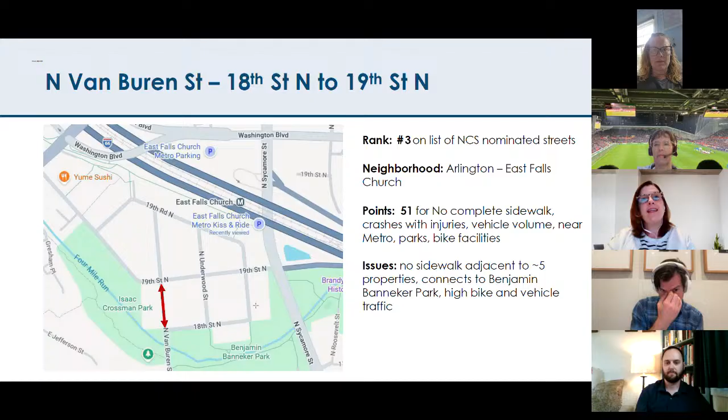The first is, and I suspect several of these will be quite well known to the group, where there is missing sidewalk in the Arlington East Falls Church neighborhood. The first section being on North Van Buren. These are very, very well supported projects by the community. They both connect to Benjamin Banneker Park. They're not super complicated because we have right of way, and it really is a matter of completing the missing link of sidewalk, in this case, adjacent to 5 single family properties.

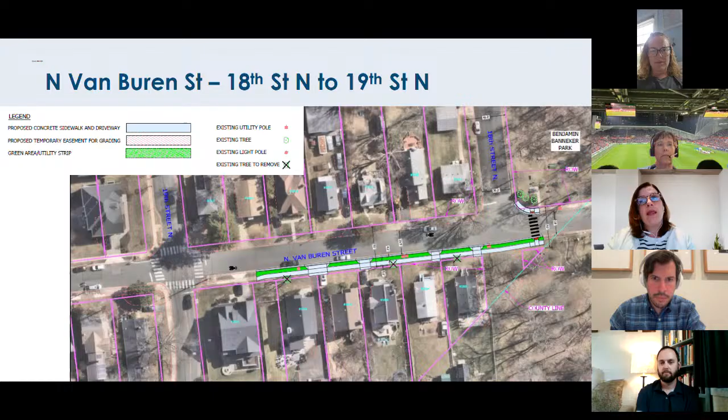So it's a very simple project scheme. We're looking to just complete the existing sidewalk network with an additional crossing across Van Buren, connecting into the entrance of Benjamin Banneker Park. The second is another small section of missing sidewalk right by another entrance into Benjamin Banneker Park. And both actually are very heavily traveled bike corridors connecting the W&OD trail through the neighborhood. So there's a lot of use and some conflict. So we hope that by completing the pedestrian facilities, it'll be actually beneficial to all modes of travel in these locations.

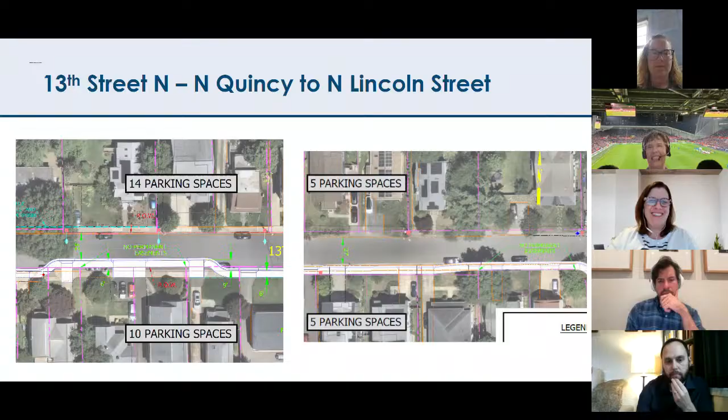And then moving on to a small project on Shirlington Road, where we similarly have a sidewalk situation where there are obstructions in the existing sidewalk. Because those obstructions continue on for many blocks, what we focused on was one accessible route from South Glebe Road to 22nd Street, so that a person walking can access the complete sidewalk network on 22nd Street South that would take you to Drew Elementary School and to John Robinson Jr. Town Square. It is not a perfect solution, but it is a fairly direct walk. It's the same facilities, just sort of the other side of Robinson Square.

And so we're focusing on just a gentle touch here to curve this sidewalk around the existing utility poles to create a contiguous, accessible path. The neck downs may also, we hope, help with some speed reduction as cars are coming off of Glebe Road. This is sort of a transition block. It would be great if we see some calming through this natural narrowing.

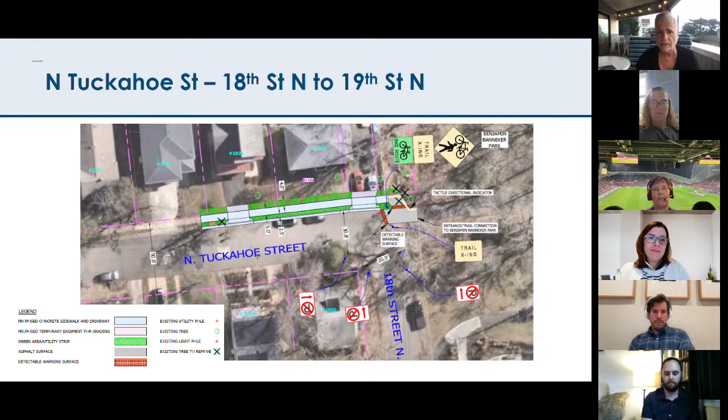And I have the same issue up in Virginia Square on 13th Street. I drive along that numerous times. The bump out, I think, is actually not a bug, but rather a feature. It will help. Actually, yeah, that's a wide street. That's a crazy wide street for a neighborhood like that.

If you're widening the sidewalks, I would say take it out of the street itself and leave parking on both sides. That will naturally slow people driving along there. So again, I have no problem with that bump out. In fact, I would allow parking along the bump out because that would be a natural choke point that would slow traffic. And there's a school just houses away from there. That's all to the good.

This is one of the things that does drive me a bit crazy, that we have so many of our residential streets that are way wider than they need to be, especially in the parts of the county that were developed after World War II. And I understand there's the fire code issues, which is something we really need to be negotiating better with the fire department about the width of our streets.

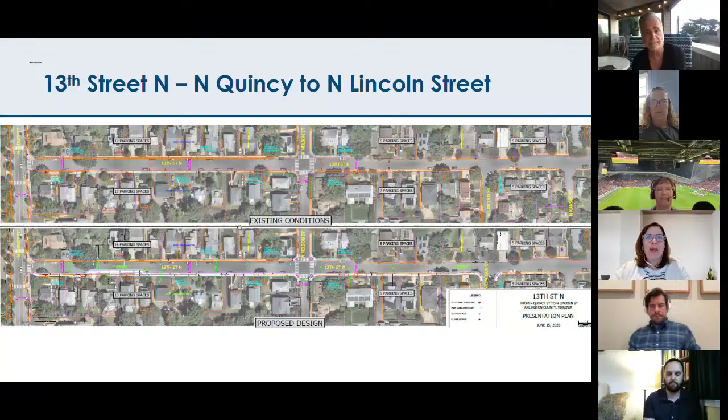It's safer to have a narrower street with slower traffic than one that would save 10 seconds for a fire truck going through. So anyway, that's my comment both on 13th Street in Virginia Square and in East Falls Church. As far as the one down in Green Valley, that's great. You have a couple of bump outs there. That's the whole point. You're going to end up slowing traffic along there. Especially, I think there's a hill there too, which is all to the better. So anyway, I'll support these definitely, but I really think we need to be thinking about why do we have these? Can we narrow streets wherever we can? Thank you.

Thank you. We did take a run at that, I will say. The previous chair did send letters and have discussion with the county manager about that, and alas, we were unsuccessful, but things change. Is that still the fire department issue? Yes. That's just crazy. I mean, that is absolutely crazy.

And the fire department definitely deserves to be taken seriously, but a lot of this is just a reaction without data and without thinking the entire thing through, with unintended consequences. So anyway, all the bump outs you put in there, go for it. I have no problem with having those there. The more the better, if we can't narrow the whole street. Thank you, Commissioner Lantelme. Commissioner Vanderpool, please.

Yes, I am really excited to see all these updates and changes, and I agree with both the other commissioners on pretty much everything. The area in Falls Church, I actually don't go that route when I bike. I go through a different part of the neighborhood, so I do not have to cross at that really busy intersection right by the East Falls Church Metro. But I understand that's kind of out of the scope of this. I agree, putting bump outs is a great way to slow traffic.

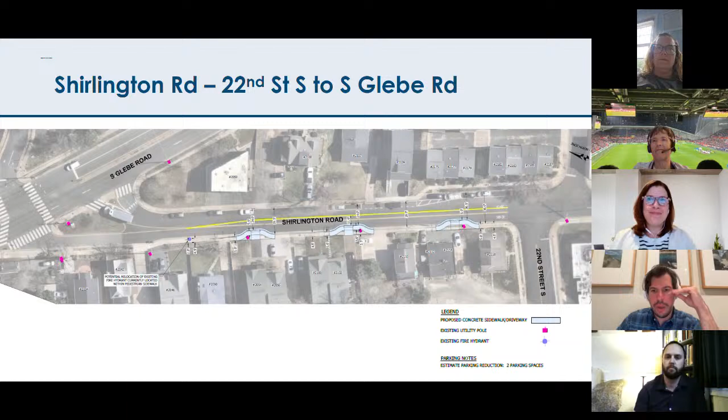I don't see any other hands up, so if you could please pull up the slide with the recommendation. All right. So I move that we vote on the recommendation that reads as follows. That the Transportation Commission recommend that the Arlington County Board approves the request to advance the following capital projects through the Neighborhood Complete Streets Program.

North Van Buren Street from 18th Street North to 19th Street North in the Arlington East Falls Church neighborhood. North Tuckahoe Street from 18th Street North to 19th Street North in the Arlington East Falls Church neighborhood. 13th Street North from North Quincy Street to North Lincoln Street in the Ballston-Virginia Square neighborhood, and Shirlington Road from South Glebe Road to 22nd Street South in the Green Valley neighborhood. Can I get a second for that?

Second. All right. Can start voting with Commissioner Forrest, aye. Vice Chair Furman, aye. Commissioner Hussain, aye. Commissioner Lantelme, aye. Commissioner Locker. I'm not. Commissioner Ludlow. Aye. I vote aye. Commissioner Theo. Aye. Commissioner Traer. Aye. And Commissioner Vanderpool. Aye. Thank you. It's a vote of 8, actually 9 in favor.

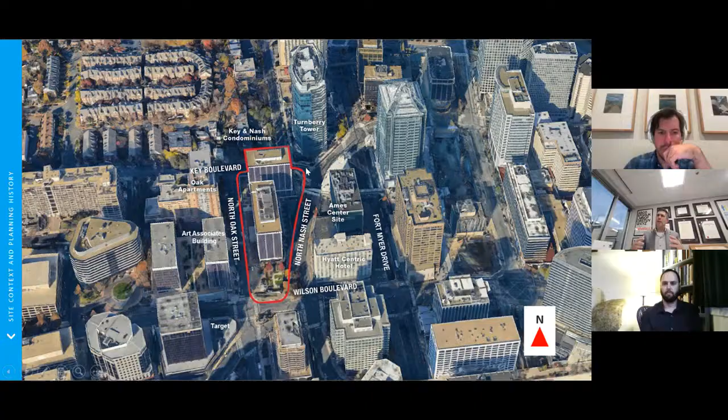As staff mentioned, what's old is new again. This is a 2.1 acre site that's located in the western part of central Rosslyn. Two office buildings that were constructed in the 1960s that have been 100% vacant for the last 2 years, a little over 365,000 square feet of development between the two of them. One thing to note is a substantial topographic drop of 40 feet between the southwestern corner of the site, where my cursor is, and the northeastern corner of the site, which is where Key Boulevard and North Nash Street is. And so a lot of the ways that we've responded to the site, handled the new monumental stairs and the 18th Street corridor have been really driven by the topographic change that occurs on the property.

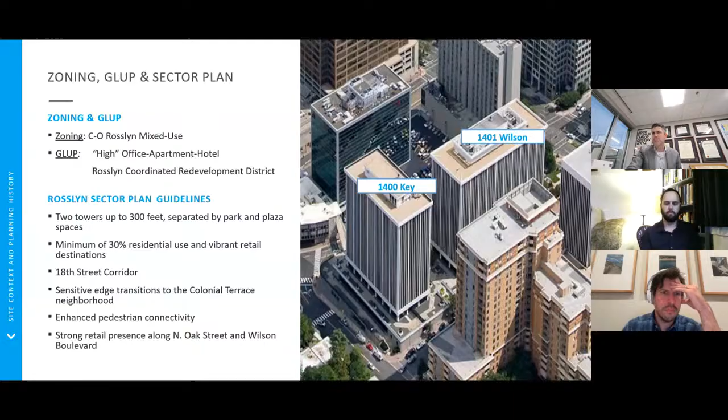Not going to spend too much time on the zoning, GLUP, and sector plan, as Mr. Gibson had already covered it. Suffice to say that we have used this as the recipe for the proposal that's before you this evening. Back in 2014, Monday received approvals to redevelop the site, as Mr. Gibson said, with an office tower and a residential tower anchored by a grocery store. These are images from that approval. And unfortunately, market conditions at the time prevented Monday from securing financing to move forward.

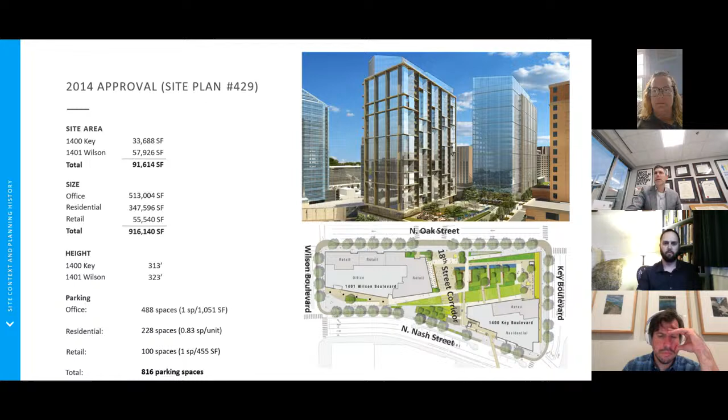But construction of the project was also hampered by the decline in office demand and the market realities in a post-pandemic environment. And so Monday spent several years of careful evaluation and landed on the proposal that is before you this evening that it believes finally realizes the longstanding vision of the Rosslyn Sector Plan for this property, specifically, as Mr. Gibson mentioned, delivering the western bookend of the planned 18th Street corridor, while at the same time delivering new housing supply and doing everything we possibly can to deliver a national credit grocery store on the site. And so what is before you essentially carries forward a lot of the same bones as was the case back in 2014. High quality public realm, urban amenities.

It retains the two tower concept, but the tower that's in the foreground, the white tower, that is the Wilson Tower. That used to be the 24-story office building. That is now proposed as a 27-story multifamily residential building. The tower that's in the background, the Key Tower, which is at the corner of Nash and Key Boulevard, is retained as a residential tower. And so between the two of them, there will be 831 residential units. That's up from 274 units, which was proposed back in 2014. There is a little over 12,000 square feet of ground floor retail in the Wilson Tower, the one that's in the foreground. And then in the Key Tower, we have the grocery store.

Back in 2014, the grocery store fronted on Key Boulevard. The retail loading entrance is on Key Boulevard. The main building entrance for the grocer was on Key Boulevard. And after a lot of discussion with our broker, it was determined that it needed to be visible from Wilson Boulevard and really should be at a much more lively environment. And so we have moved it up to the 18th Street corridor, where it can be at the confluence of the key pedestrian and vehicular crossroads at Oak Street and the 18th Street corridor. And so that's what is shown here.

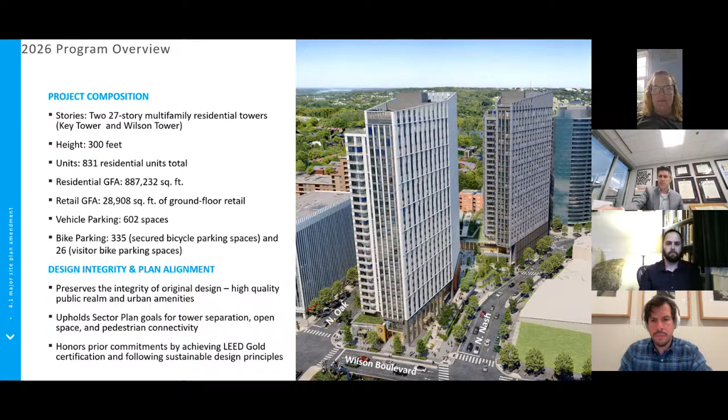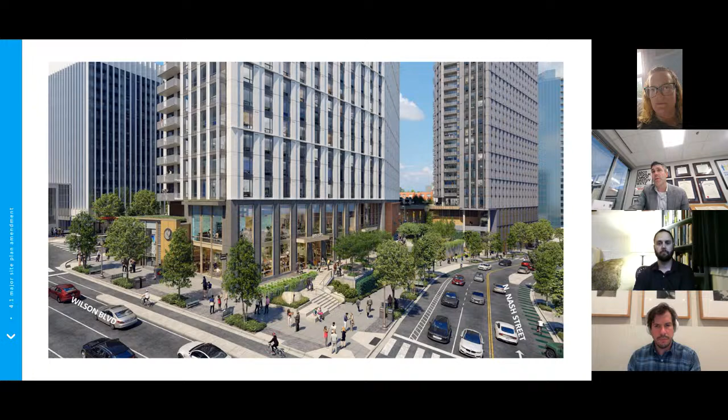One of the unique things, and my hat's off to both the architect, but especially our landscape architect, has been how people experience the grade differential on the site, that 40-foot topographic drop, and navigating it, providing ADA accessible sidewalks in and around and through the site for people of all abilities. And so that is one of the benefits of moving to this product.

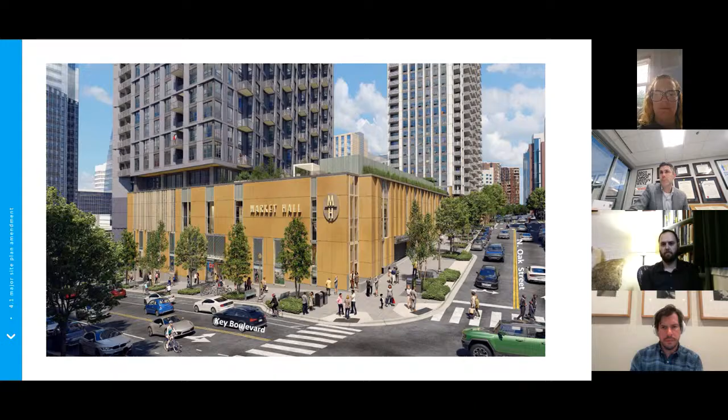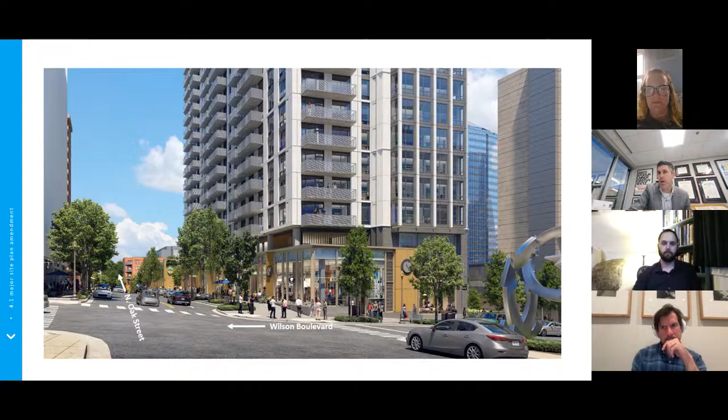And you can see the grocery store where it has the M and the H, the market hall, in the background, which again provides visibility for that grocery store directly from Wilson Boulevard, but will anchor the northern end of that strong retail corridor street. And then when you come back into that central area of Wilson, Clarendon, and North Oak Street, it produces a zone that is very pedestrian friendly, lively, and active, with all the different blocks that feed into that large intersection.

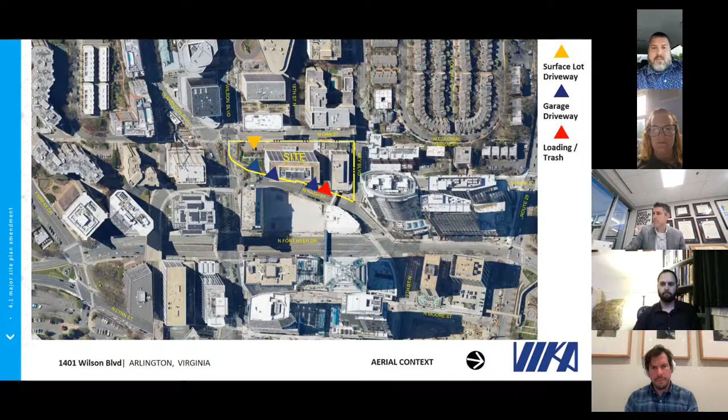So I'm going to pause here. I'm going to recognize Mike Minkowski, and Mike, I will advance the slide as you wish. Yeah, hello everybody. Can you guys hear me? We can. Okay, great. A lot of great stuff said already. I'll try not to be too redundant, as Andrew and Rob have both done great so far.

So here's just an aerial image of the existing site. The blue arrows represent existing garage entrances. The yellow is a surface lot on Oak Street, and then there's a single loading today. Flip to the next one.

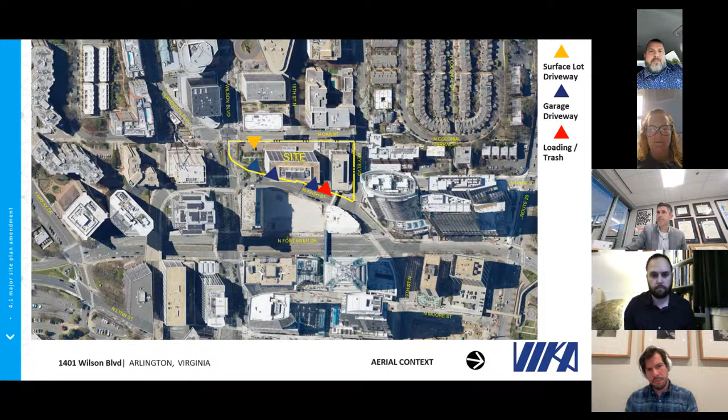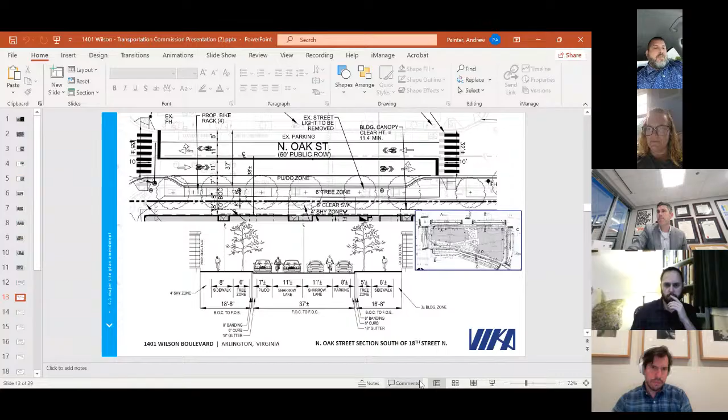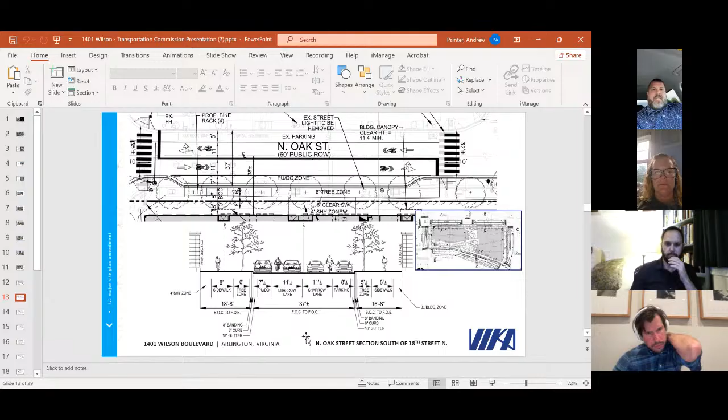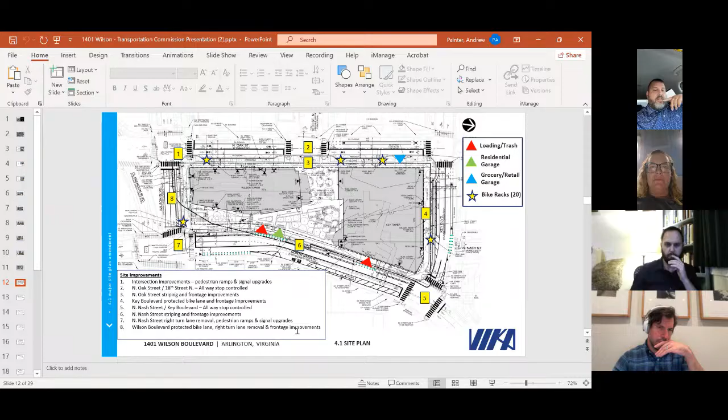At 2, we're at the 18th Street North and North Oak intersection. That intersection will be converted from just stop control on 18th Street to an all-way stop, with the North Oak Street approaches, which are uncontrolled today, stopping as well. 3 just highlights the improvements to the streetscape that are being made along the frontage of North Oak Street.

Rounding the corner to Key Boulevard. Key Boulevard will also have an improved streetscape and restriped roadway. The bike lane that is there today is going to be flipped and inboard of the parking, creating a protected bike condition along that roadway. Coming down to Bullet 5, again, as Rob mentioned earlier, at this intersection today, only the Key Boulevard approach is stop controlled. This intersection will be converted to an all-way stop intersection as well.

Again, many improvements happening along Nash Street. Today it's a two-lane road with some parking on it, so it feels very wide. In the future, with the protected bike lanes that are proposed, as well as the restriping and on-street parking, it should slow down the street quite a bit and feel a lot tighter for drivers, making it more safe for pedestrians.

And then as we round the corner coming back over to Wilson Boulevard at Nash Street, again, at this intersection, we'll have some pedestrian and signal improvements for our quadrant and the adjacent receiving sides. And then finally on Wilson Boulevard, we will be removing the right turn lane, as Rob mentioned, in lieu of a protected bike lane.

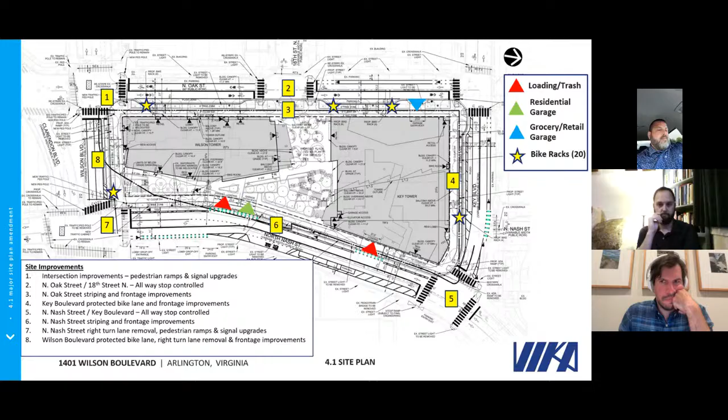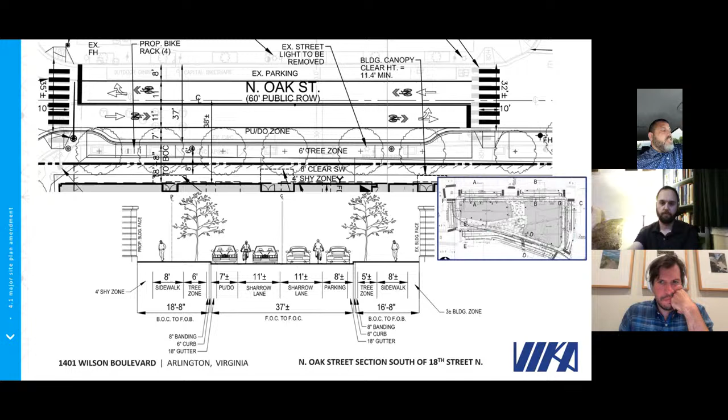So the next series of slides, Rob touched on these in pretty good detail, so I won't belabor the point, but this section here is the North Oak section between Wilson and 18th Street. Along this frontage, you can see that we're proposing PUDO parking. It's approximately 150 feet or 7 spaces. So normally when we do PUDO on a project, pickup drop off, short term, you may get 1 or 2 spaces, and there's a lot of competition for those spaces.

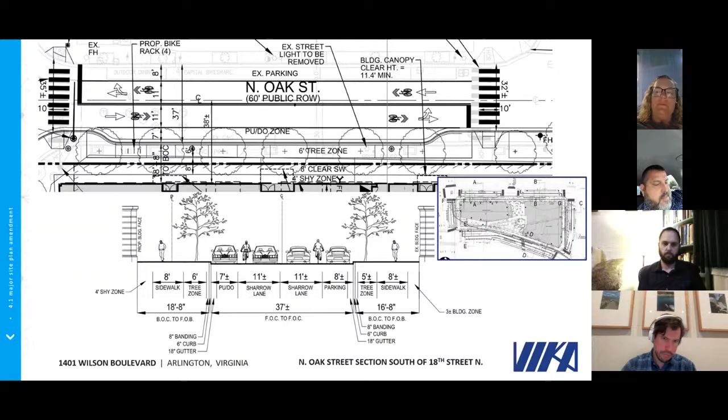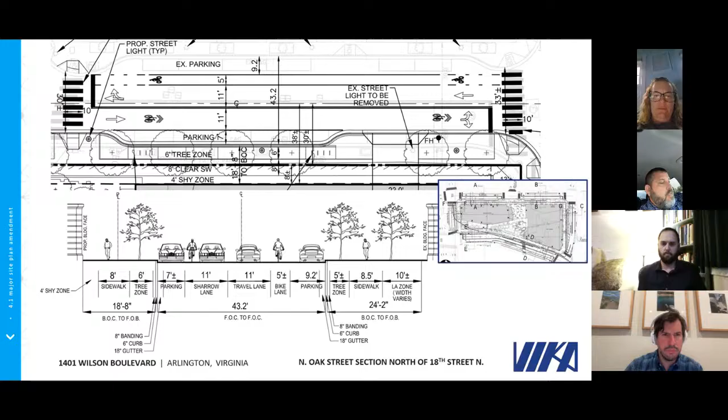So the abundance that we're able to provide here should go a long way in preventing the double parking that we see quite a bit in urban areas. The next one is just the northern section of Oak. Rob hit on this. We will be providing a bike lane in the southbound direction and a sharrow in the north. And then we'll swing around to Key Boulevard, which we also talked about. There'll be PUDO on this block. There's about 5 spaces available for PUDO, and that'll serve the Key Tower.

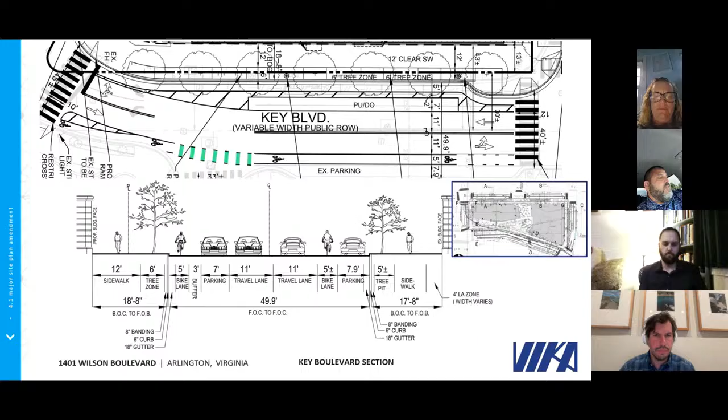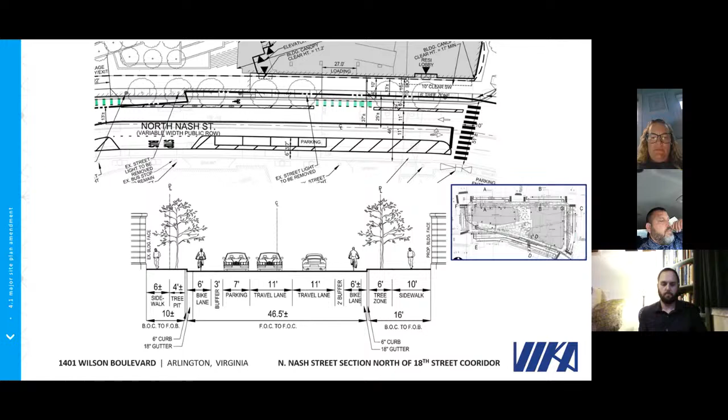And then this is the Nash Street frontages, and Rob had mentioned this. We actually don't have the updated slide in this presentation, but we are going to have a raised bike lane along the loading section here, which will create a much safer condition for cyclists and restrict short-term parking along the frontage.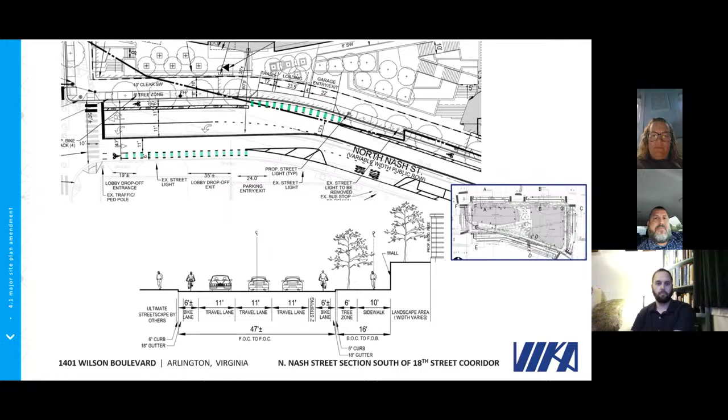This is the southern section of Nash Street. We will be removing the slip right turn lane, so it'll be a 3-lane section, but we won't have that big island that exists today. This will create a shorter cross section for pedestrians, as well as the protected bike lane that'll be there in the future in the north and southbound direction. And then finally, Wilson, you can see the protected bike lane in the plan view on the top of the page and the section on the bottom.

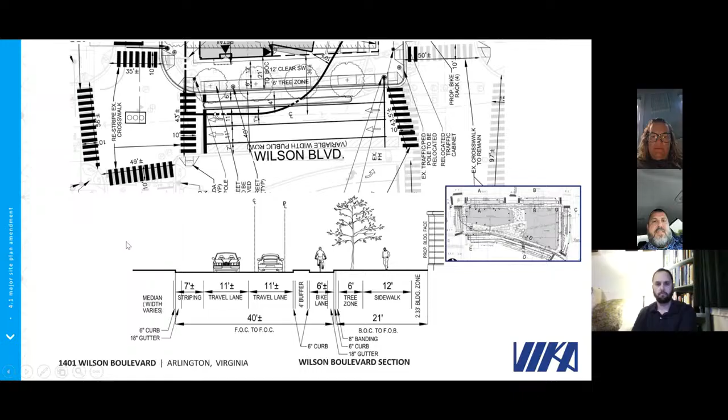The tabs have been summarized a couple times. The next slide. I will point out that we will go with 5% EV on the first day, which is a total of 30 spaces, and we'll have an additional 20% EV ready for a total of 120 spaces in the future based on demand. And there'll be a total of 16 accessible parking spaces. I think everything else was pretty well covered.

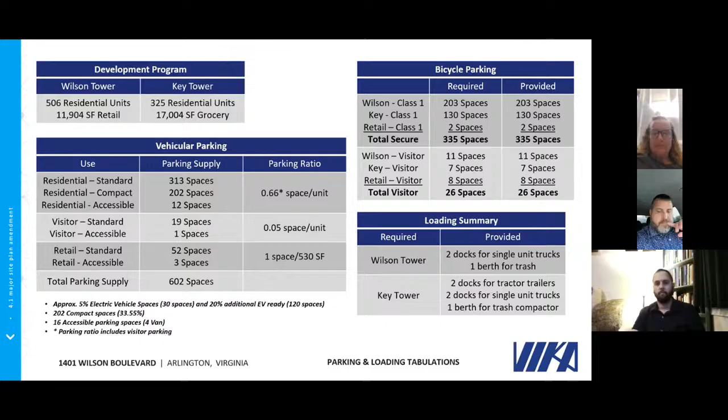So we have a couple of slides about just some of the details of the parking arrangement. This slide is really focused on the loading dock. As mentioned previously, the dock will be able to accommodate 2 vehicles over 50-foot tractor trailers. It'll have a roll-off compactor to serve the grocer. And then on the right side, there'll be 2 single unit loading bays, and those single unit vehicles will be able to pull head in and head out of the dock.

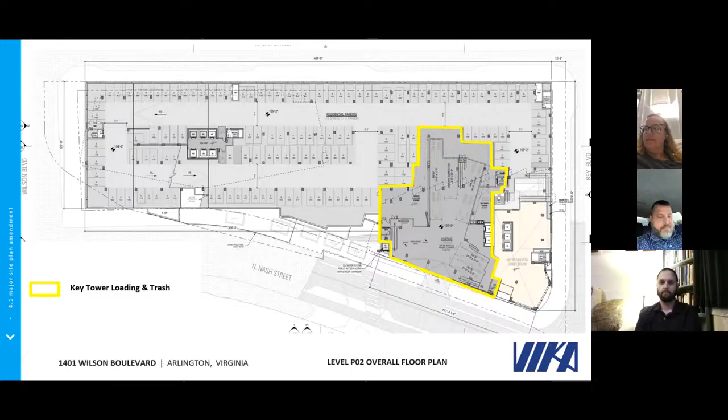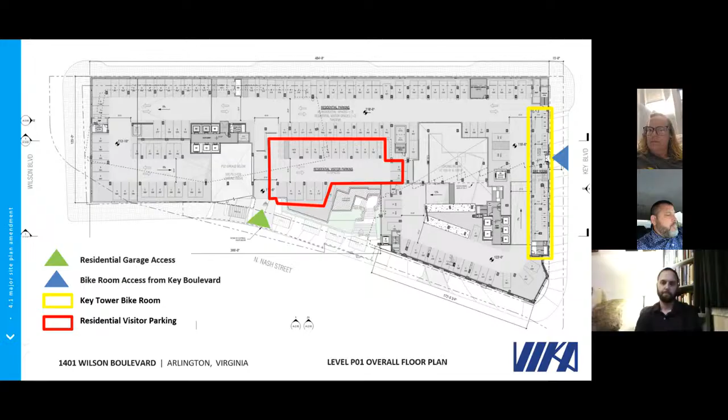This slide is just identifying the residential visitor parking space in red, and then the bike room for the Key Tower in yellow, and the blue arrow represents direct access from the street to that bike room. In yellow, highlighted here is the bike room for the Wilson Tower, and the green arrow shows the direct access from the Nash Street frontage into that bike room.

The red highlighted boundary is the retail grocer parking. The star within that boundary identifies the location of two retail visitor bike parking spaces that are large enough to accommodate the cargo bikes. And then the blue square is just showing the location of the Wilson Tower loading. It'll have two docks that can accommodate single unit trucks and a trash room.

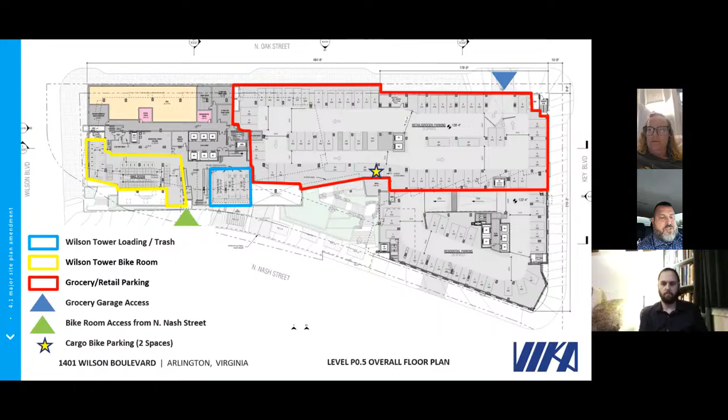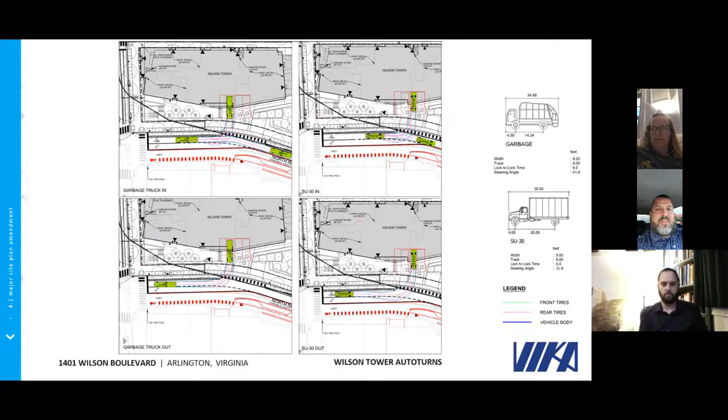The next series of slides, we don't have to talk too much about these. This slide that's up here shows the garbage and single unit vehicles turning in and out of the loading bays for the Wilson Tower. This slide shows the Key Tower and the access of the single unit vehicles. You can see all the maneuvers in and out can be accommodated, head in, head out into the berths coming north and south on Nash Street.

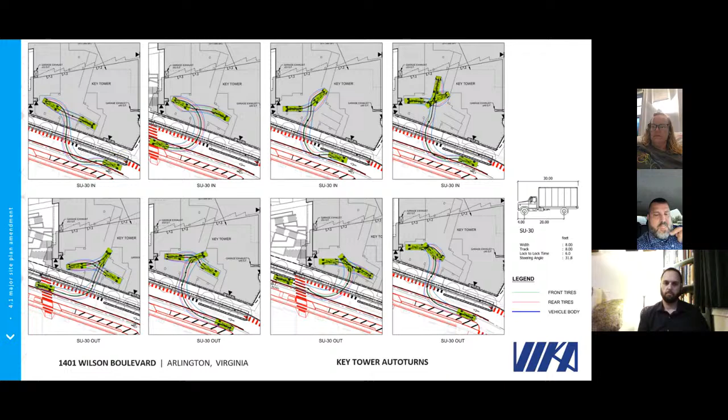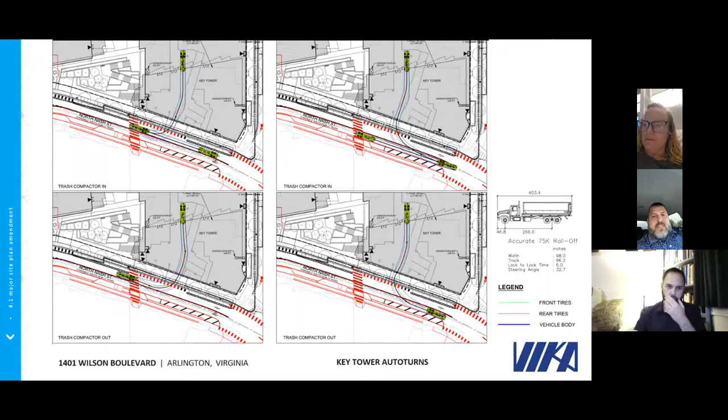This slide shows the trash compactor truck that will be bringing the trash for the grocer in and out. And that'll have to be a head in or back in maneuver. And we can go to the next one. So depending on the user will depend on the actual size of the tractor trailer needed for the site. So we tested a variety of sizes from a WB50 all the way up to the largest, WB67. So this slide and the next slide show a series of turning movements where the tractor trailers can be accommodated within the street section.

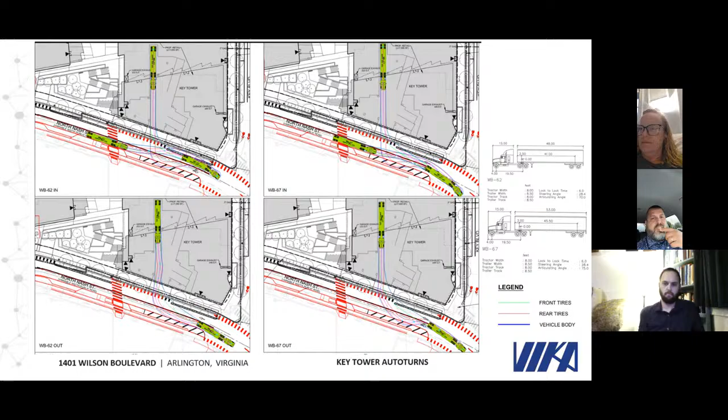All right, Mr. Chair, this is Andrew Painter again. That concludes our presentation. I just do want to say one thing, this entire project has been a really good partnership with DES staff and CPHD staff throughout the entirety of these proceedings. We appreciate Rob's help on this, guiding us through, it's been a really positive working relationship. So our entire team's here to answer any questions, and we appreciate your consideration.

Yeah, thank you, Mr. Painter, and to all of the other presenters. Commissioners, do you have any questions? I don't see any hands being raised right now. Commissioner Sain, you go first. There we go. There I am.

Yeah, so sorry everyone, I was late to the meeting, but great presentation. I was on the SPRC for this project, so I just had a couple of thoughts and a couple of questions. I just want to echo overall, this was a really enjoyable SPRC. I think the project is really great. Given the topography, you've done a really good job of developing the space, good housing, retail activation for Rosslyn. The grocery store, great amenity, the 18th Street corridor is fantastic.

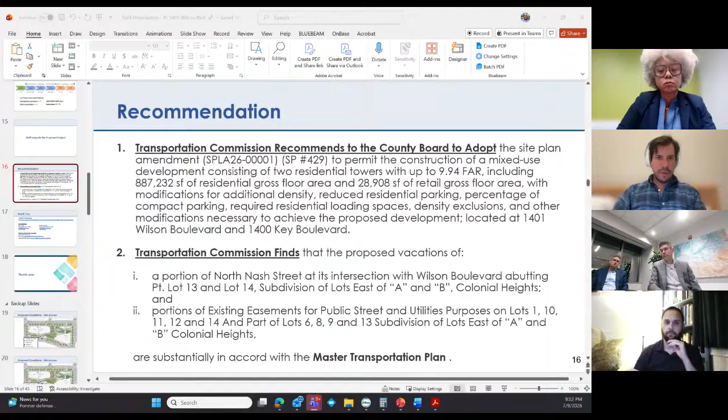Second. All right. Who seconded it? I couldn't see who that was. Was it Casey? Meg. Meg, okay, thank you. Yeah, thank you. I'm just pulling up my spreadsheet. I had to close everything to restart. Just a second. Okay. All right. Well, I think we can get to voting.

Commissioner Forrest. Aye. Vice Chair Furman. Aye. Commissioner Hussain. Aye, sorry. Thank you. Commissioner Lane, tell me. Aye. Commissioner Walker, in case she has joined us. No. Commissioner Ludlow. Aye. I vote aye. Commissioner Theo. Aye. Commissioner Traer. Aye. And Commissioner Vanderpool. Aye.

Ayes have it, 9-0. And I move to vote on the second resolution, where the Transportation Commission finds that the proposed vacations of a portion of North Nash Street at its intersection with Wilson Boulevard abutting PT lot. What does PT mean? Partial? What is that? Part. Part. All right. I'll start again.

The resolution reads as: Transportation Commission finds that the proposed vacations of a portion of North Nash Street at its intersection with Wilson Boulevard abutting part Lot 3 and Lot 14, Lot 13 and Lot 14, subdivision of lots east of A and B, Colonial Heights, and portions of existing easements for public street and utilities purposes on lots 1, 10, 11, 12, and 14, and part of lots 6, 8, 9, and 13, subdivision of lots east of A and B Colonial Heights are substantially in accord with the master transportation plan. Seconded. Thank you.

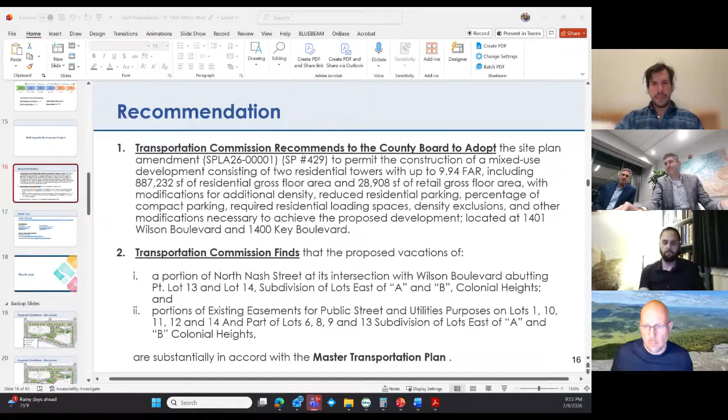Thank you to both staff and the applicant for your presentations. Look forward to this being built. Thank you all very much. Thank you. And that concludes the item for us tonight. Yeah. Our next meeting is, I'm looking up right now, it is September 3rd. September 3rd. Okay. We have a little bit of a break.

Yeah. Right. And anybody have anything to report or any pressing matters? I see Commissioner Theo, you're joining the neighborhood Complete Streets, so that's good. Vice Chair Furman, we'll begin with you. A quick update on Arlington Transportation Futures. There's no immediate ask from us, but we will see a little bit of additional outreach and opportunity in the next couple of months. I think Commissioner Hussain may have more that he wants to share on that front as

well. But with our next meeting being in September, I think that there may be a request that Commissioner Hussain and I have for you all before then, but we'll keep you apprised of what the next action items are. So thank you all. Thank you.

Yeah, Commissioner Singh, see you have your hand. Yeah, thanks. Actually, I'm sorry, I didn't see. I think Commissioner Theo had his hand up. Yeah, go ahead. Sorry, Adam. Yeah, you're on a different page for me.